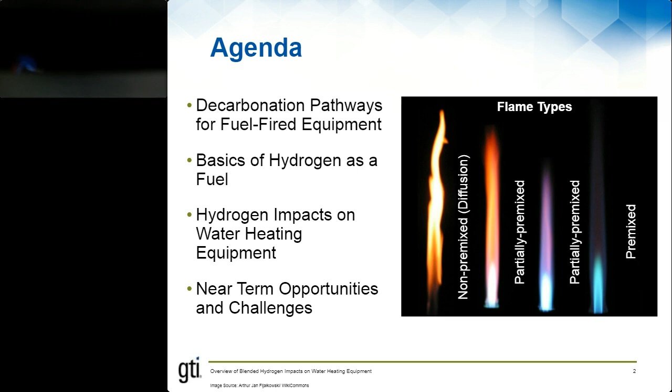And so what are we actually here to talk about? First, you should see a video of a water heater burner operating with a 30% hydrogen blend with methane. And this is really what we're talking about. This is the hot topic for this particular session here. We want to see what are the impacts when we change the fuel by adding this low or no carbon addition to natural gas. The first version you saw was a standard burner operating in most gas water heaters.

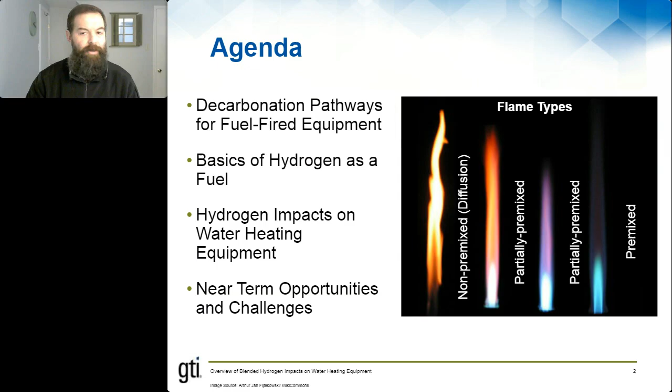This is an ultra low NOx version operating in water heaters in California and more recently in the Salt Lake City area of Utah, so an ultra low emissions version of the same thing. These are the workhorses of water heating, but let's first talk about decarbonization. So for the more than half of homes and businesses that use fuels for water heating today, we need to acknowledge that this is a large set of the building stock.

Over 80% of homes, for example, were built before the year 2000. The average lifespan of a home in the U.S. is estimated at about 130 years. So when we're looking out to 2030 and 2050, a lot of the buildings that we need to decarbonize exist today.

And for those that are served by fuel-fired technologies today, where they may be mostly existing buildings in cold climates, where they have thermally intensive loads, or increasingly where decarbonized fuels are available on a regional basis, the technology needs are sort of more of what we talk about through this forum and others: gas energy efficiency, thermally driven heat pumps, micro CHP, and fuel cells. We'll focus today on the fourth item here, hydrogen-fueled equipment.

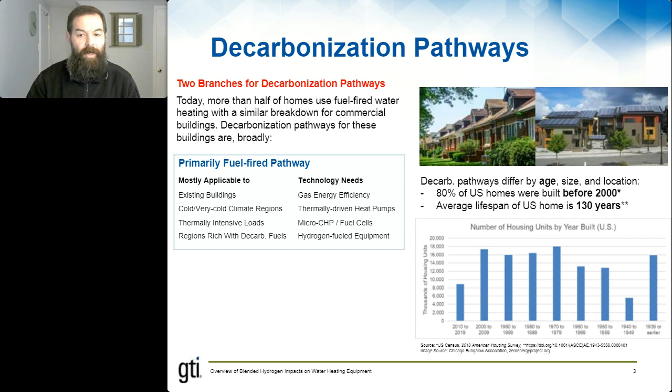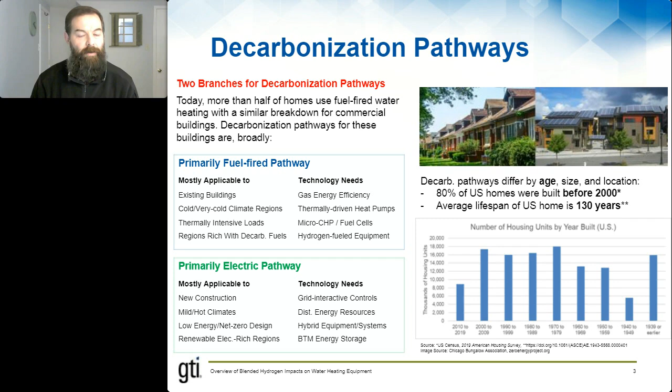Of course, there is a second and a different branch of where decarbonization will play out for these buildings, and this will be primarily served by electric technologies or electricity as a delivered energy source. This may apply mostly to new construction or mild and hot climates, low energy net zero designs, areas where renewable electricity is plentiful and cost effective. The technology needs will differ for these, where balancing services on the grid side will be more important. DERs and a lot of the other topics addressed throughout timely forums like this will apply there as well. So again, we're going to focus on the first pathway here and hydrogen as a fuel.

So let's talk about why. Decarbonized fuels can be coupled with energy efficiency to really drive greenhouse gas emissions reductions. I think most folks are aware that hydrogen as a fuel emits no CO2 directly, and it can be blended with natural gas or biomethane for standard products, and there can even be specially designed equipment to use 100% hydrogen for heating applications or other applications as well. Hydrogen doesn't really exist on its own, but it can be viewed as a way of storing a lot of energy for a long period of time, and that energy can be renewable. So that's really why it's having a bit of a moment right now.

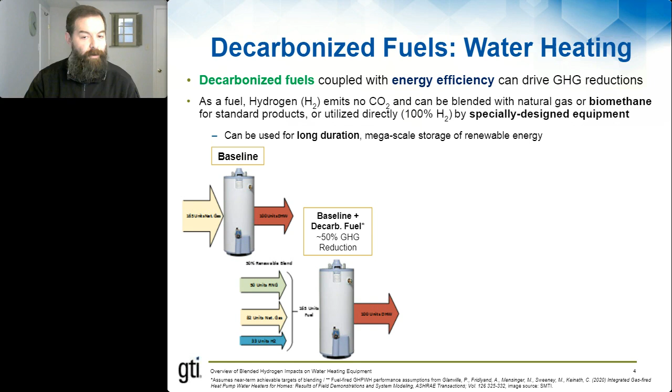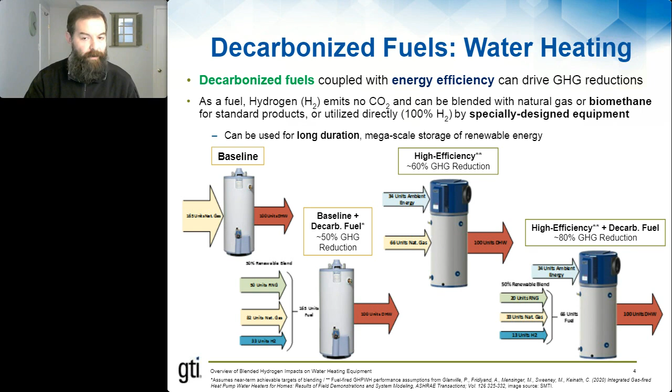Now let's just illustrate this in a simple way. Most of the water heaters out there using delivered fuels today tend to be low efficiency storage type. We can offer a blended decarbonized fuel to those products to drive a roughly proportional reduction in greenhouse gases. Of course, as we know through ACEEE and their leadership, energy efficiency is often the best place to start when you want to reduce greenhouse gases. And with heat pump technology for fuel-fired products, we've shown in previous studies that we can reduce a significant amount of greenhouse gases. Now, what we're talking about today is combining the two: going with high efficiency and decarbonizing the fuel, either partially for this talk today, or in the future with pure decarbonized fuels.

So where does this fit in context? GTI recently joined EPRI in an effort called the Low Carbon Resources Initiative. This is really looking at economy-wide decarbonization strategies through 2030 and 2050. While this is somewhat of a complicated diagram, it represents in a simple form, believe it or not, how decarbonized energy carriers, hydrogen, ammonia, carbon capture, these things that are scaling up right now, can play a role in how we decarbonize how we use energy in the future. For us, in water heating, we're looking at buildings in the upper right-hand corner, where in the future delivered pure or blended hydrogen may be a part of our energy mix, and this is what we're going to talk about today.

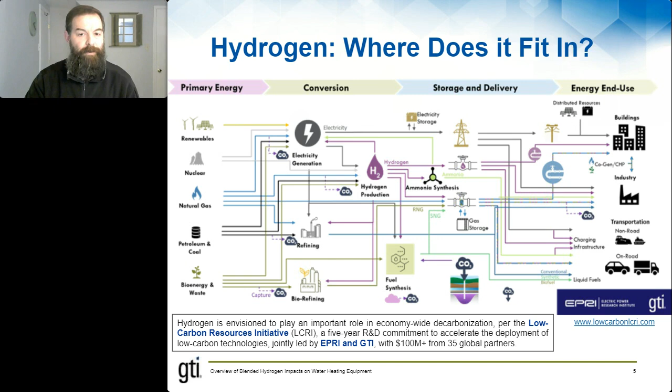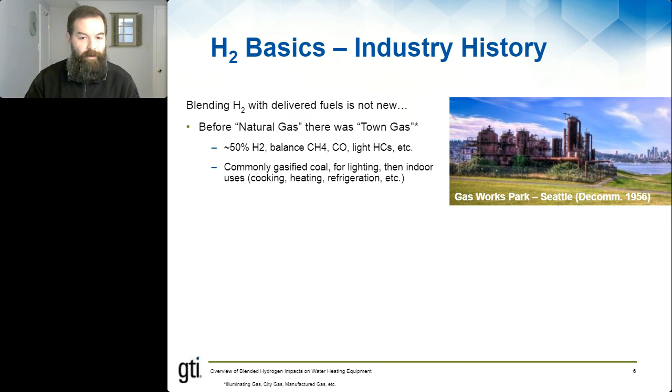So let's talk a little bit about history here. Blending hydrogen with delivered fuels is not new. In fact, before natural gas, there was town gas, and in a way, natural gas as a term is intended to distinguish from that. I used to live in Seattle, and there's a great park there called Gasworks Park, which is a former coal gasification facility that delivered town gas to Seattle in its earlier heydays. That gas is about 50% hydrogen in most cases, with the balance traditional hydrocarbons. Whether it's from gasified coal or others, it tended to be used for lighting and then later for indoor use. Of course, after World War II and the expansion of natural gas as a delivered fuel, a lot of this was phased out, and that particular facility was turned into a pretty cool park there off of Lake Union.

But there are places, such as on Hawaii, on their main island, where there are delivered fuels today that do contain some hydrogen. And it's a sizable amount of customers there. Of course, this legacy exists in terms of how we design and certify equipment, as these manufactured gases, as they're called, are part of current studies and standards, in addition to propane and natural gas, how products are certified today.

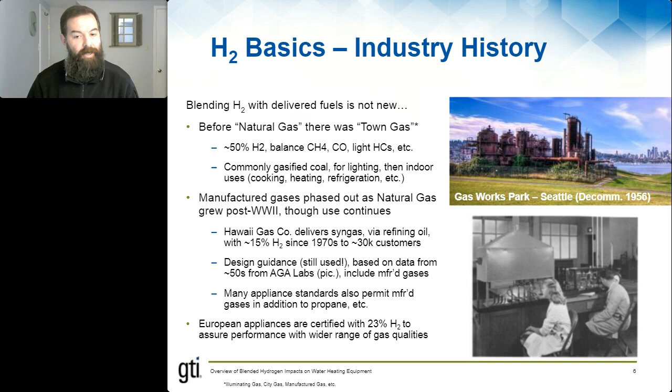Of course, in Europe, where hydrogen is looked at a little bit more seriously as a delivered fuel for decarbonization, appliances today are certified with a hydrogen blend of up to 23% to look at changes in gas quality, which tend to be a wider variation than we see in North America.

Now, there's a lot of activity in this space right now, where hydrogen is being looked at as demonstrations to generate, store, and use hydrogen at multiple scales. A lot of them are in Europe or Asia, as shown here, but increasingly they're in North America as well. And we'll hear about Kevin's work in Southern California, really interesting updates there in North America.

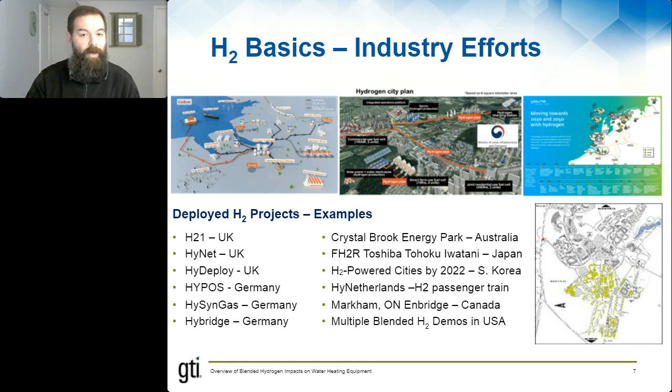Now let's talk about hydrogen too. It doesn't exist in the same way as electricity. It's generated from something. So in terms of carbon content, we have to be mindful of this. Brown hydrogen and gray hydrogen, these colors that are often used, represent fossil sources of hydrogen today. And for gray hydrogen, steam methane reforming of natural gas, this is the vast majority of hydrogen that's used today and generated.

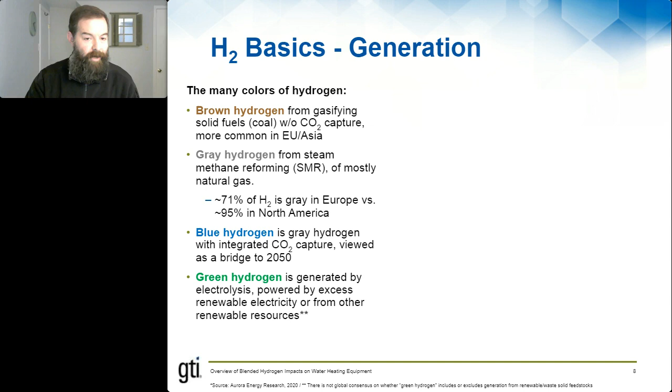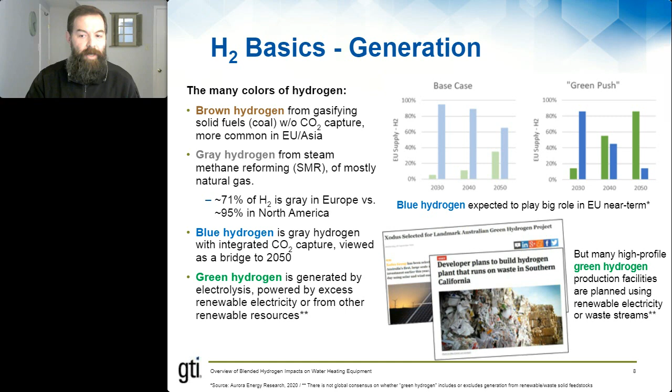However, in the future and the near term, we talk about blue hydrogen and green hydrogen, whether it's a gray hydrogen with carbon capture or if it's generated from renewable resources as a form of storing excess renewable electricity or utilizing a renewable stream. There are a lot of studies looking at how these colors of hydrogen will shift over time, but I think really the goal is to shift towards green hydrogen as far as the color spectrum is concerned.

Now, when we add hydrogen to natural gas, it really can be first viewed as a gas quality issue because natural gas does vary in gas quality, how appliances handle these shifts in the constituents of natural gas today. Building on a lot of efforts in Europe, where GTI and some of our colleagues are involved, there are 3 general tiers of blending when it comes to how it impacts equipment, and they're shown here by volume. So, for instance, 10% by volume in most cases, no or minor adjustments are necessary to existing equipment.

Medium blending, 10 to 30%. Again, these are very broad numbers. Maybe some small adjustments are possible with combustion hardware or controls. And then high blending, roughly speaking, 30% or above. At this point, you might as well be designing a specially designed piece of equipment to handle pure hydrogen. And these are sort of general rules of thumb.

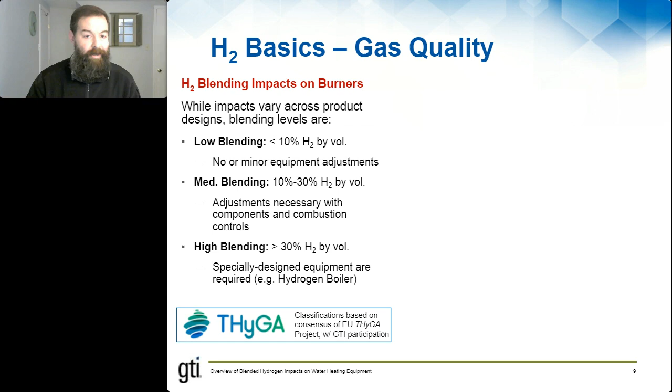And why is this? Hydrogen is a very different fuel. This chart shows some of the properties that we'll explore throughout the session here, where while it does have no carbon dioxide emissions as it's used, that response is nonlinear due to the fact that it is a much lower density as compared to methane, and also has a reduced heating value as well. It has a hotter and faster flame, it's more readily lit, and it can also impact NOx emissions and flame stability as a result of those 2 properties.

And finally, as sometimes discussed, hydrogen has long-term impacts on equipment as well due to the fact that it's very small, it can leak, and it also can impact materials as it does that. It also has a reduced requirement of combustion air as you blend it with methane, and we'll see how that offers some benefits in some testing.

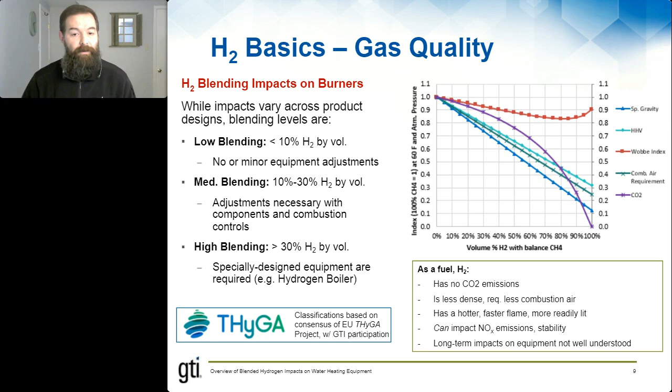Now, for the vast majority of burners that are out there today, we can put them into 3 broad groups. And this really has to do with how air is mixed with fuel prior to ignition. If there's no air mixed, if fuel and air meet at the point of combustion at the flame, we call it a diffusion flame. These are not as common in a lot of the applications we're talking about here. Pilot light is one example, but in some cases, some fireplaces are operated in this way as well.

Partially premixed, where some air but not sufficient. Lambda as a marker, in that case, is between 0 and 1. This is the vast majority of burners that are out there today that are operating in our homes and businesses. And premix, which is often used for higher efficiency equipment, compact equipment like tankless water heaters and ultra-low NOx versions, as it is a good way of reducing NOx emissions.

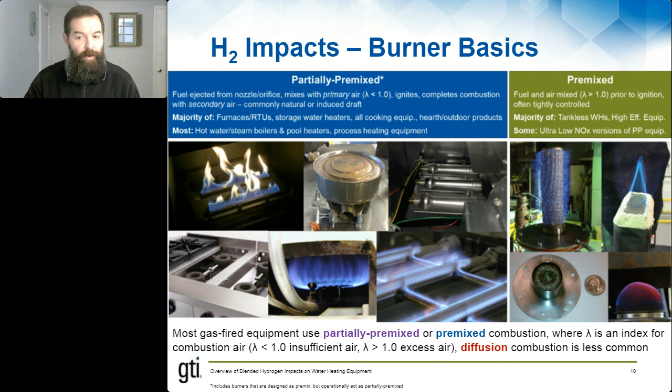This is where fuel and air are carefully combined prior to ignition and often can be controlled independently of one another, which is not the case for partially premixed. So these distinctions we will refer to throughout this session.

Now, for water heaters, one of the first things that we notice is that because of its reduced volumetric density, adding hydrogen will derate or reduce the heating rate of the water heater, meaning that less BTUs will be delivered from the flame to the water heater itself. And that's a universal property.

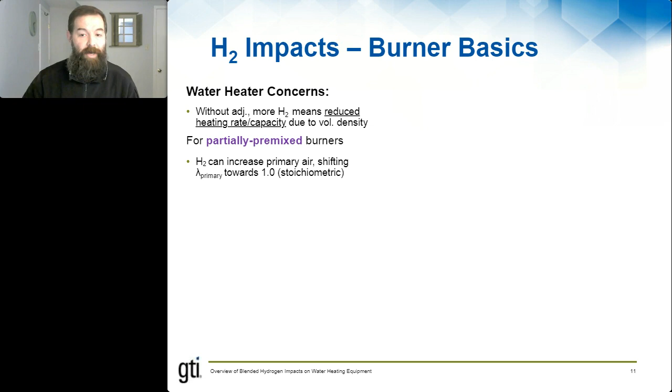For partially premixed burners, which represent the vast majority of those applied in water heating, both commercial and residential type, other things that we'll notice is that the primary aeration, the amount of air that's mixed with fuel prior to ignition, will shift towards stoichiometric, meaning it will increase. It will go towards 1 in most cases. And this is important because we're talking about a change in flame speed.

A lot of concern with adding hydrogen means that we may have flashback, which is where the flame actually kind of sucks back towards where the fuel and air are coming from, and the flame will often go out. The system will need to be addressed as a result. The opposite impact, where the fuel and air flow rate is faster than the flame speed to the point that the flame blows off, is not as much of a concern in this case here. Now, also the flame may be hotter, and it also may have stability issues as well as noted.

Where things get complicated is that the burner design, the combustion chamber design, how the flue or the venting is deployed, the back pressure, all of these things will have impact. So these are not necessarily predictive traits. We'll see that with some results in just a second. However, there are two indices that are important when just talking about the amount of hydrogen we're adding.

It does impact the Wobbe index, which is a frequent term used in gas interchangeability. This represents that for processes that have the same Wobbe index, the heating rate delivered to the appliance will be the same for an orifice where the fuel is coming out with a fixed pressure. So this is really a way of asking, will it have the same heating rate, roughly speaking. And for hydrogen, the Wobbe index is much more stable than some of the other properties we're talking about.

Another property which is also applicable to partially premixed flames is the combustion air requirement index. And you can see it's defined by the air-to-fuel ratio based on the fuel properties. This gives us a sense of how the primary aeration, or lambda, will be impacted for partially premixed equipment.

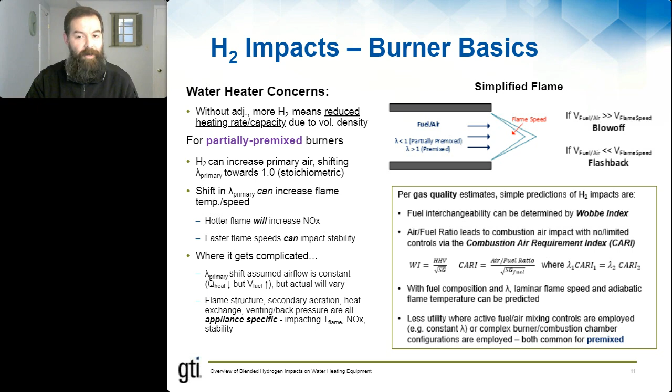If we take a pancake burner, a very standard burner in water heating, and we have a standard representation of natural gas here, a Wobbe index of 1373, a specific gravity, a way of showing the volumetric density as shown. The firing rate is shown. The primary aeration is shown as 60%. That means 60% of the air for full combustion is mixed with fuel prior to the point of ignition. The air-to-fuel ratio and the combustion air requirement index are also defined.

If we take that same burner and we add 30% hydrogen by volume, you can see how things are impacted. The Wobbe index reduces by a slight amount, meaning that our heating rate will reduce slightly as well, but a much larger reduction in the volumetric specific gravity of this particular fuel. Firing rate will decline as a result, meaning the heating rate to the appliance will also decline.

We'll show later on the test results suggest that the efficiency really doesn't change as much, but the capacity will, so the unit will run longer, but not necessarily less efficiently. Primary aeration goes up, and air-to-fuel ratio and combustion air requirement index are also impacted.

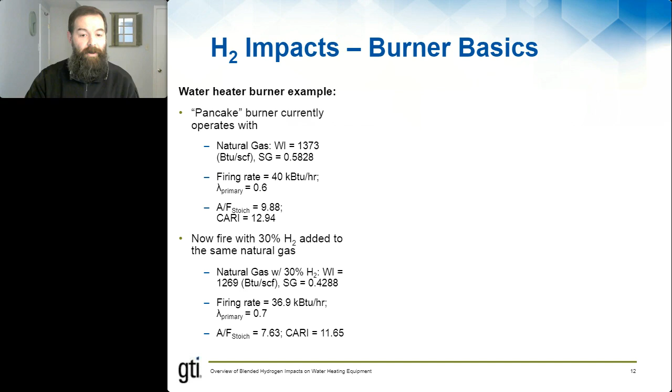Now we can chart some of these properties here. This shows the laminar flame speed for different blends of hydrogen based on a GTI model. We start at the blue point here and move to the green point here. And why is this important? You can see our flame speed is increasing.

We're also going towards lambda is equal to 1, or the equivalence ratio, the inverse, is equal to 1 as well. This can mean that we may look for stability issues with this particular case here. On the premix side, where we're on the other side of the dome, depending on how air is controlled, we can either shift left or go straight up if we have a constant lambda or a device that tries to maintain a fuel-air ratio through advanced controls.

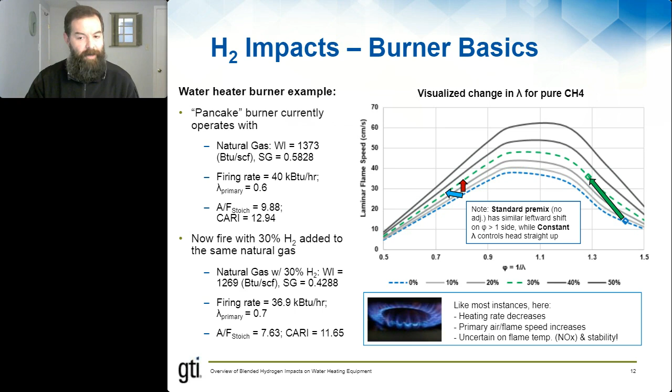So I think the overall point is that it's complicated. We can learn some things about what happens when we add hydrogen, but we don't know everything. But like most instances, the heating rate decreases, air-to-fuel ratio, air and flame speed will increase, but we can't say much about flame temperature or NOx or stability. So these show you some photos of most of the appliances out there.

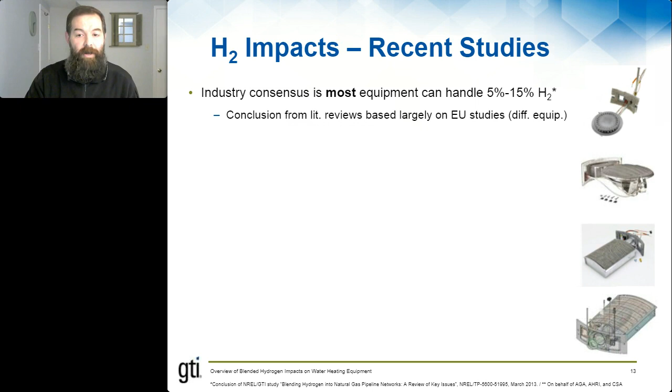Let's talk very briefly about some of the studies out there today. The industry consensus is that most appliances can handle 5 to 15% hydrogen. This is largely based on studies looking at what's been happening with Europe. There's been a lot of activity in this space. You'll hear about some of them today. The level of hydrogen blending varies in these studies. What the balance fuel is: in the GTI study and others it's balance methane, and in others it's balance natural gas. And then what equipment are selected and what burners are operated also vary, and of course how they are operated.

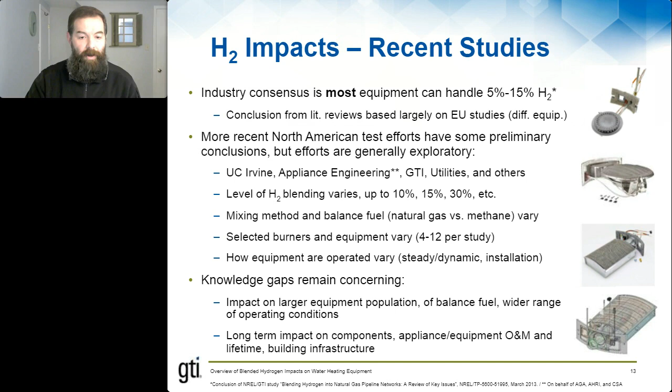So there are some knowledge gaps that remain. What is the impact on larger populations of equipment? What happens when we have a different balance fuel, a wider range of operating conditions? Or of course, what are the long-term impacts on the equipment life as well? These are all open questions at this point.

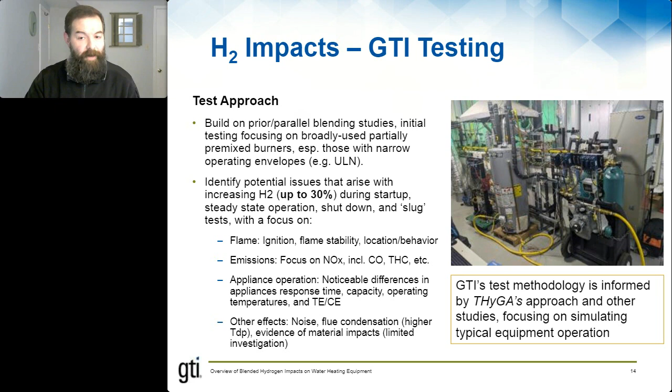So let's get quickly into some results before I wrap up here. GTI is engaged in some testing of water heaters and other appliances with up to 30% hydrogen blends. You saw a video up front on some early results here. We're looking not only at the ignition and flame stability and location and behavior of the flame, but also emissions results. We're looking at the appliance operation, the impact on efficiency, and other more customer-facing impacts like noise, excess condensation. And this is an effort to align with some of the other studies that are underway in Europe.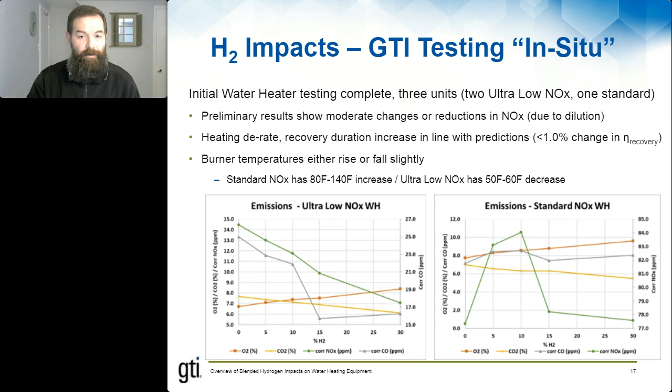So let's just cover what's next here. GTI will be continuing to perform short and long-term tests on these kinds of equipment and other appliances as well, moving from furnaces to fireplaces, cooking products and boilers. We'll be sharing these results more widely outside of presentations like this. We're also looking at parallel efforts to introduce small-scale hydrogen sensors into equipment and small-scale distribution, and also importing and tech transfer with 100% hydrogen-tolerant products under development abroad.

And there are a number of blending efforts underway, studies underway, where in the field we can also apply some of these techniques. And then finally, we talk about hydrogen, but there's also renewable natural gas or biomethane. We do have some studies underway looking at the impact on trace contaminants in that kind of replacement natural gas, and also on the back end, looking at what we can do in larger buildings in directly capturing the carbon

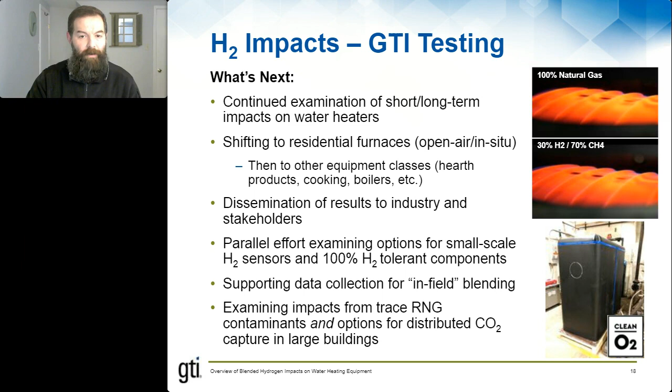dioxide. So looks like I went over a little bit here, but thank you for your interest. No worries, Paul, and thank you. Way to end up with that teaser of showing off that big black box.

So thanks again, Paul. Our next speaker is Yan Zhao, and Yan is a research scientist at the UC Irvine Combustion Laboratory. You'll see in just a minute, he is literally there. Yan has experience working on both domestic combustion systems as well as gas turbine combustion for power generation. And right now, he's working on renewable hydrogen adoption in residential appliances. So Yan's going to build on, or maybe zoom in on some of what Paul was talking about and talk very specifically about hydrogen-fueled impacts on residential equipment, some of the simulation and testing results that they have seen there. So with that, Yan, I will turn it over to you.

Yep. So thank you, Aaron, for the very nice introduction. So hello, everyone. My name is Yan Zhao. I'm from UC Irvine Combustion Lab. So I'm going to share some of our experimental results today on hydrogen-fueled impacts on residential equipment.

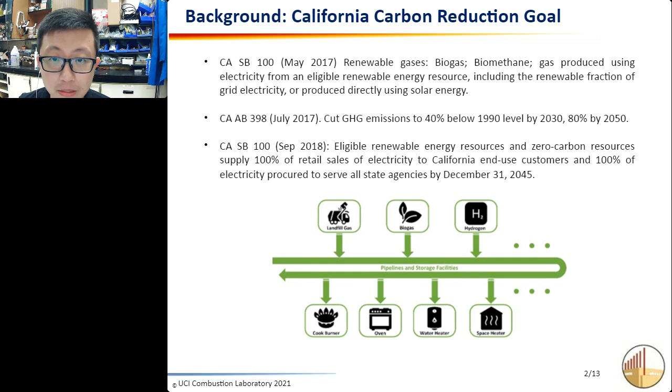So we are located in California. California has a very ambitious carbon reduction goal. By 2030, it's trying to reduce the carbon emissions 40% below 1990 level, and 2050 is going to be 80%. And by the year of 2045, California is trying to achieve 100% renewable electricity. So one way to help achieve these goals is to blend some renewable gases into the pipeline natural gas. And the challenge is what would be the influence of the renewable gas on these appliances we already have.

And here shows the California residential appliances status. So on the left side, you can see around 49, like 50% of the residential natural gas is consumed by water heating, and 37% by space heating, and the rest would be cooking and dryers and other applications. For electricity use, it's kind of different. The water heating and space heating only takes around 5% of the electricity use, and most of the electricity is used in lighting, fridges, and TV or computers.

So down there on this plot, you can see the different appliance types. The dark bars stand for the gas appliances, and the light color bars stand for electric appliances. So you can see for water heating appliances, more than 90% of the appliances in California are still gas appliances. So it's very promising if we want to replace the natural gas with some renewable gases, especially hydrogen, because hydrogen is carbon-free.

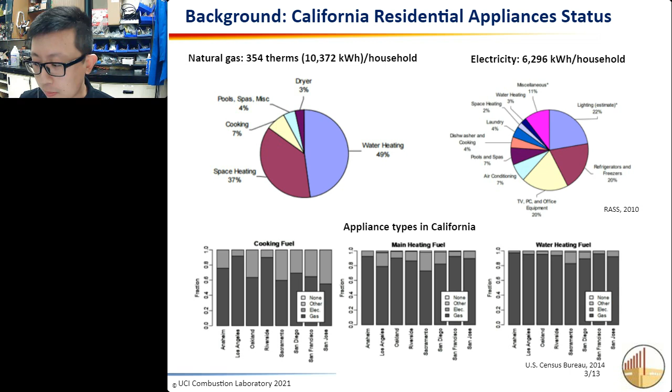And so when we want to replace pipeline natural gas with renewable hydrogen, we want to understand what's the difference between these two fuel classes. So you can see the comparison chart here. Methane is one of the major contents in natural gas. So you can see hydrogen has a much lower density compared to methane. And also the flame speed of hydrogen is 5 times that of methane. And also the flammability range of hydrogen is much wider than methane.

So one of the main properties we care about in combustion devices is the heating load. So you can see the equations here. The heating load is proportional to the Wobbe index. So that means when we don't change the pressure drop from the pipeline to the combustion device or the combustion device parameters, the heating load of the combustion device is going to be proportional to this Wobbe index.

And so even if hydrogen has a much lower heating value on a volume basis compared to methane, the Wobbe index of these two fuel classes are quite similar. You can see here methane is 52 megajoule per cubic meter, and hydrogen is around 48.5. So that means when we try to replace natural gas with hydrogen, the heating load will not change too much.

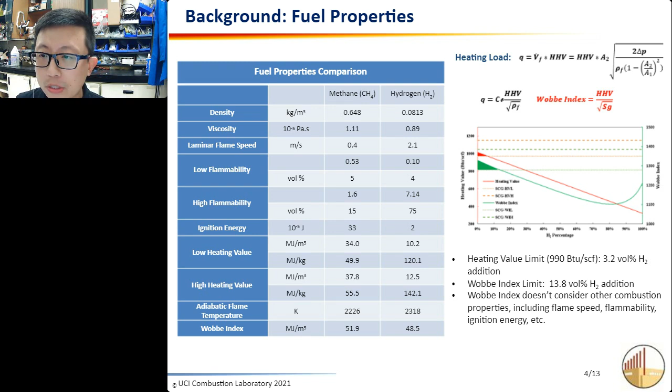And due to the similarity of the Wobbe index of these two fuel classes, we can inject around 14% hydrogen. But in our study, we're not limiting ourselves based on these regulations. We just want to see how much hydrogen we can inject into different appliances. And also the Wobbe index doesn't consider other combustion properties, including flame speed, flammability, or ignition performances. So we want to see what's the influence of hydrogen on all these kind of combustion performances.

And the emissions would be one of the major concerns for current water heating applications. You can see here are some selected NOx emission regulations and CO emission regulations in America now, because we are located in Southern California, and we have the South Coast Air Quality Management District here, which has almost the most strict regulation in North America. So currently, the most strict regulation on NOx emission is 10 nanograms per joule, or 15 ppm, based on 3% oxygen correction. And in the year of 2015, the state of Utah also adopted this regulation. So more and more states are trying to adopt this low NOx water heater regulation.

So if you want to buy a water heater online, for example, from the Home Depot, you can check. There are notes here saying that California or Utah residents need to check the labels. And there are usually two types of labels. One is saying that maybe this water heater doesn't meet the ultra low NOx regulation. Some water heaters say that they meet the low NOx standard of California. So AQMD is certifying low NOx water heaters. If you go to their website, you can check what water heaters are considered as low NOx or ultra low NOx water heaters.

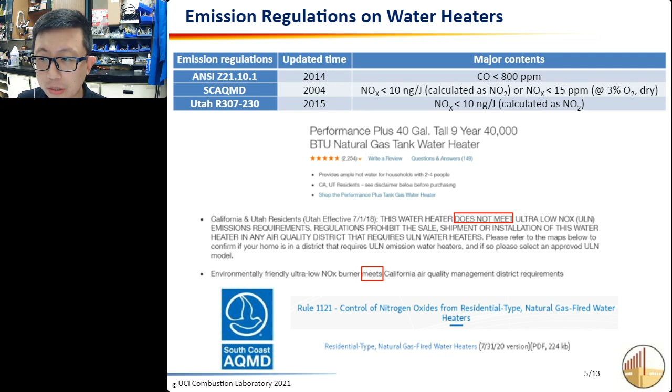So usually there are two types of residential water heaters. One is the storage water heater, one is the tankless water heater. So we tested both types. Today I'm mainly going to talk about the tankless water heater here. You can see here we have the fuel mixing panel. We try to mix different fuels together and then supply the fuel mixtures into the water heater. You can see there are two stages of heat exchangers, the primary heat exchanger in the tankless water heater and the secondary heat exchanger, which is trying to condense the water from the exhaust, so trying to take more heat from the combustion. And we have different HORIBA emission analyzers trying to measure different emission species, including NO, NO2, N2O, ammonia, CO, unburned hydrocarbons, etc.

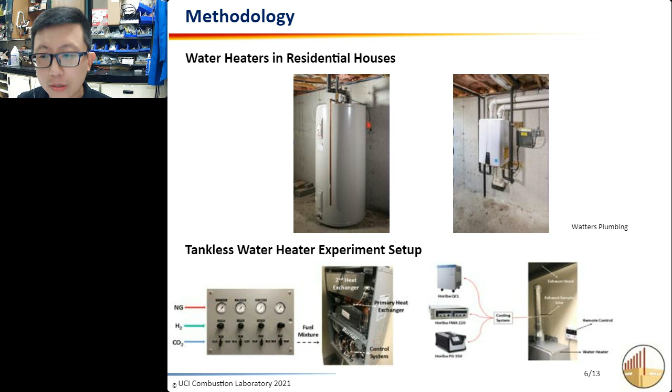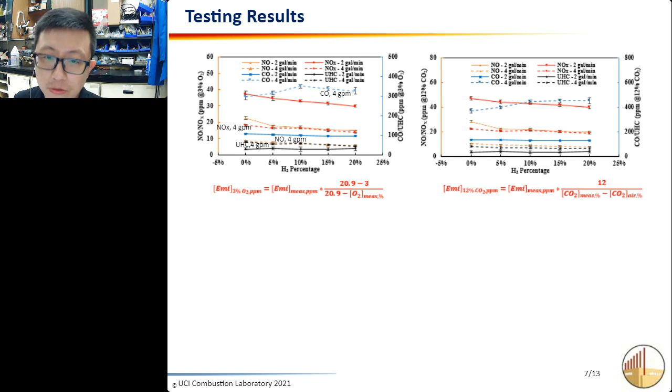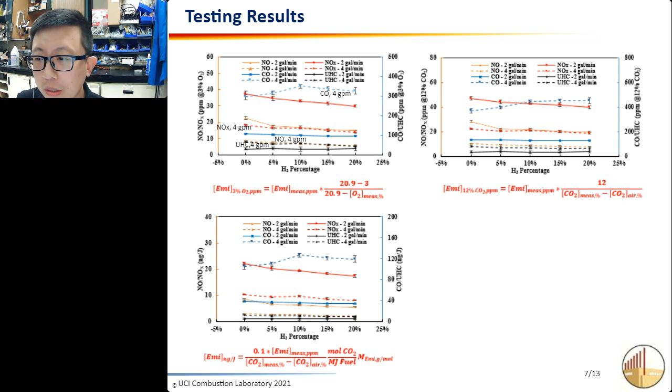And there are different types of correction methods. So the first plot is the ppm level based on 3% oxygen correction. And we also have the CO2 correction. And here we have calorific correction, how many nanograms per joule emissions. So generally speaking, hydrogen addition into this tankless water heater will decrease the NOx slightly, but doesn't change the CO or unburned hydrocarbon emissions.

And the second plot shows the air-free correction, which shows a relatively flat curve. You can see the decreasing trend of the NOx is not too obvious. This is due to the property of this equation. You can see the CO2 is in the denominator. So when we try to replace the pipeline natural gas with renewable hydrogen, the CO2 in the denominator will decrease, so the total value of the emissions will increase. That's why we see a relatively flat curve here. And also the water flow rate influences the emissions of this water heater.

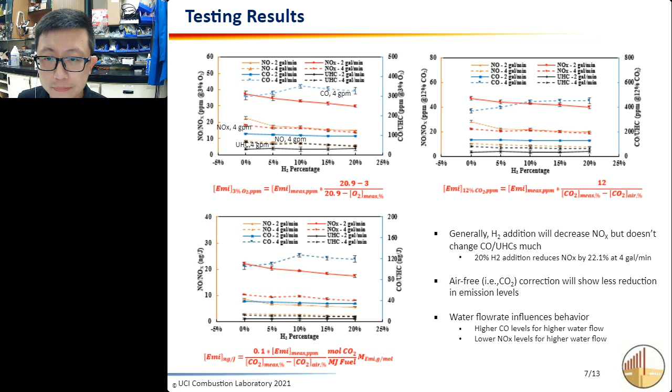So some other observations. For this tankless water heater, we did see a higher water condensing rate from the secondary heat exchanger as we add more hydrogen, because the only product of hydrogen combustion is water. So we did see some more water coming out of the water heater from the condensing heat exchanger. And also we did see a slight efficiency increase when we try to replace pipeline natural gas with hydrogen, but the increase is not very obvious.

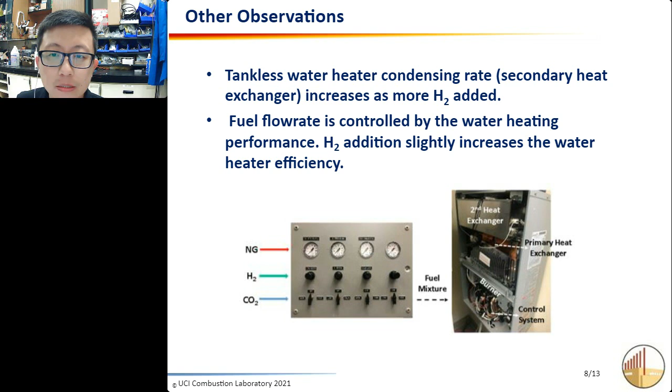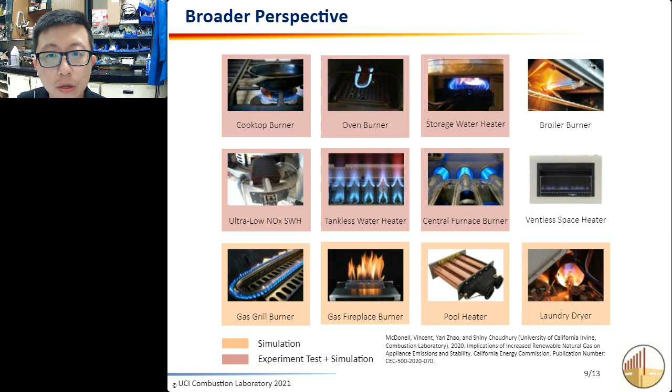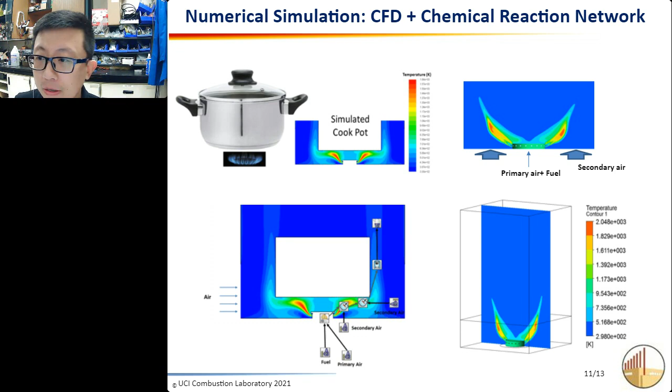So conservatively speaking, if we want to replace around 10% of the pipeline natural gas with hydrogen, we can reduce 1.63 million tons of CO2 every year in California. And this is equivalent to around 354,000 gasoline vehicles being removed from the road.

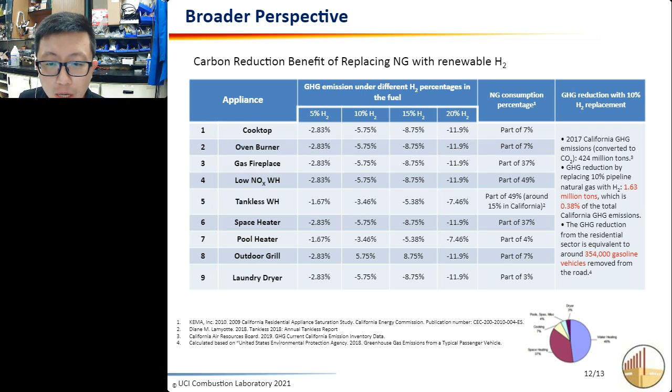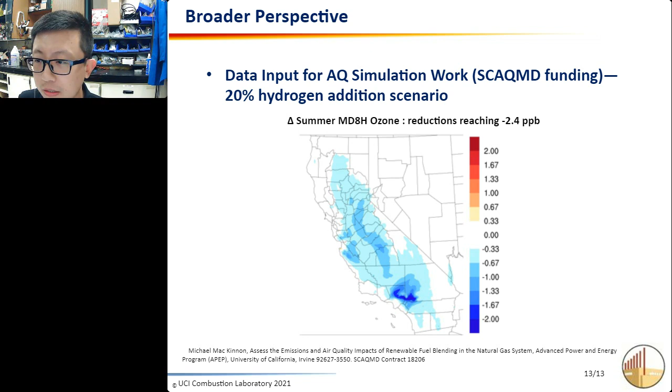And in our lab, we're also doing a big picture analysis on how the hydrogen addition to the pipeline natural gas will influence the air quality in California. So this is the project we are cooperating on with South Coast Air Quality Management District. So here is the primary result. When we try to replace the pipeline natural gas, we can reduce some NOx emissions from the combustion devices, which influences the ground ozone level. Again, if you are interested, please contact us so we can share the results with you.

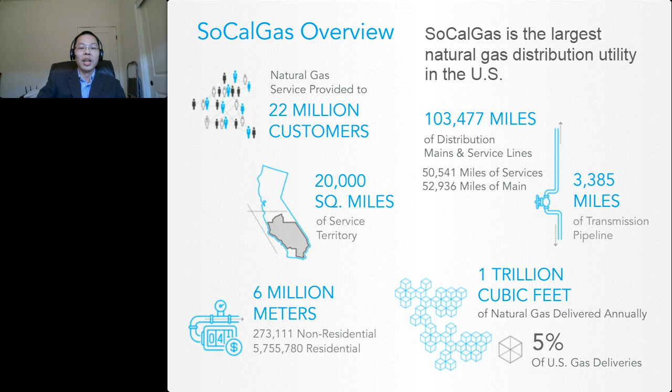So just a little bit of info about SoCalGas. We are the largest natural gas distribution utility in the United States, serving approximately 22 million customers through about 6 million meters. Our service territory covers over 20,000 square miles through over 3,000 miles of transmission pipeline and over 100,000 miles of distribution pipeline.

So very recently, SoCalGas announced our goal to become the cleanest, safest, and most innovative energy company in America. We believe that every Californian deserves a clean, affordable, and resilient energy future. And hydrogen is one of the key opportunities before us to make these goals a reality.

So in the state of California, our Public Utilities Commission has already opened that window of opportunity for the state's natural gas utilities to help create a hydrogen blending and injection policy that will really ground the hydrogen as a clean energy fuel for California's future.

Of course, when we talk about blending hydrogen into our pipeline system, it all starts with safety. Our blending policies in development revolve around the safety of the public, our employees, and the pipeline system. In order to develop and inform our policies, we have been embarking on intense research, collaboration, demonstration projects that will ultimately lead to a blending and injection standard on our system.

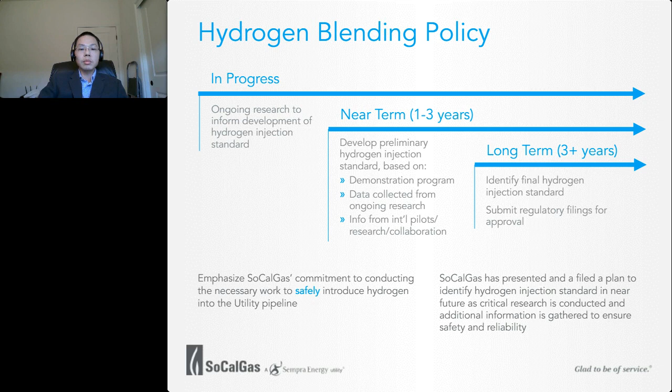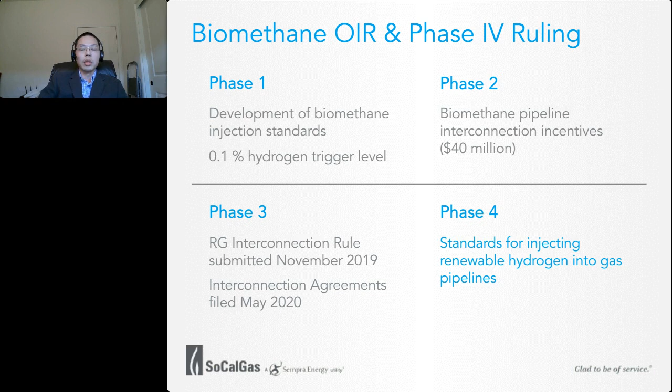So certainly the opportunity of hydrogen in the natural gas infrastructure is not without its challenges. Paul and Jan have spent some time discussing the unique properties of hydrogen and how they impact our appliances. At SoCalGas, we're looking at hydrogen blending through 3 primary focus areas. So that's safety, reliability, and integrity.

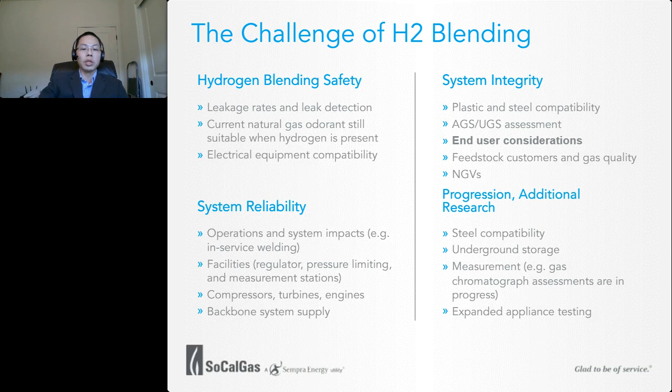Okay, so what have we done, or what are we doing at SoCalGas to investigate end-user impacts from hydrogen blending? Well, we do have multiple research efforts ongoing now and have already been completed. What's relevant to today's discussion is the residential and commercial appliance testing we conducted between 2014 and 2015. For this test, we investigated several different types of appliances that did include a traditional tank-type water heater with an ultra-low NOx burner and a condensing tankless water heater, which I'll be sharing some info on today.

To help us better understand the impacts of blending, we tested at 5% hydrogen by volume, 10% and 20%, and compared those results to our typical pipeline gas. These results included performance measurements such as the energy consumption, flame characteristic observations, such as noting any flame lifting, yellow tipping, or flashback, and measurement of the gas constituents to calculate the heating value data for interchangeability impacts. So very similar to the testing that Paul and Jan have been doing in their respective laboratories.

So a couple qualifications that I'd like to point out before we move into the information. First, our lab is an experimental test lab, so we're not a certified lab. So the results that we collect are primarily for learning purposes. The second thing is the key folks who worked on this project back in 2014, 2015, they're actually no longer with the company. So I'm more than happy to answer your questions to the best of my ability, but I may not have the answers to specific experiences related to the actual testing.

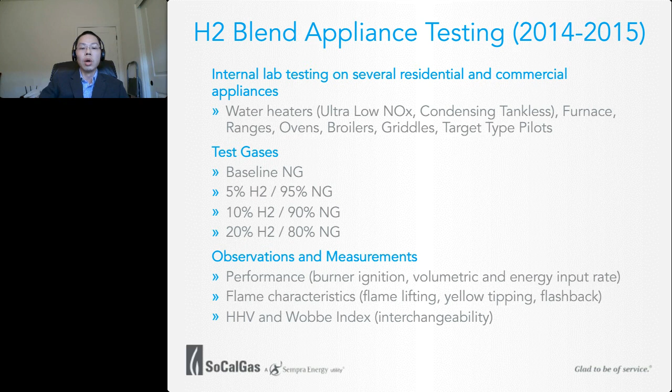And the third thing I want to point out was, although the team did collect emissions data during the testing, the methodology they used was not verified, so I won't be sharing those specific results today.

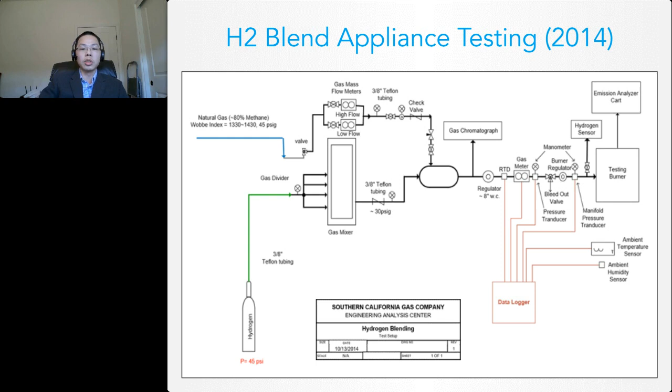Okay, so starting off with some performance results on the ultra-low NOx water heater. So as expected, the fuel volumetric input rate in the orange line, it might be difficult to see these colors, and I apologize. The volumetric input rate went up with increased hydrogen concentration, while the energy input rate measured in BTUs went down, and you can see that with the blue line.

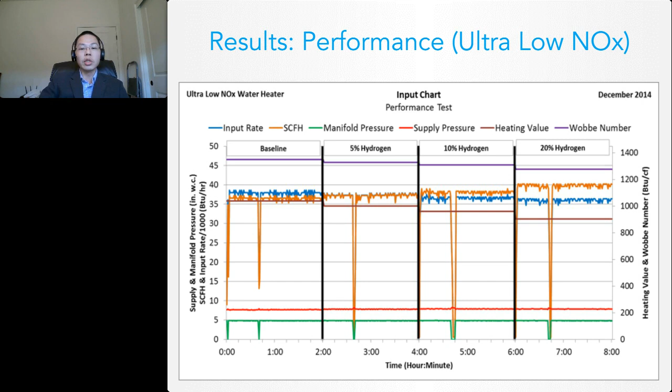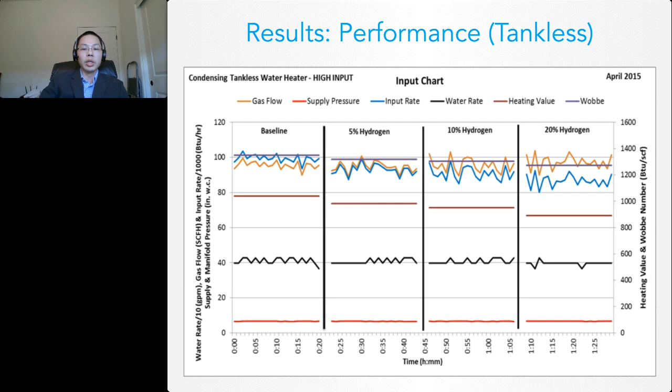Here's that same data set for the tankless water heater. So there's some more dramatic bumps in the data due to the modulating operation of the tankless water heater, but overall we see the same patterns of the increasing volumetric flow and the decreasing energy input, heating value, and Wobbe index with increasing hydrogen concentration.

So as mentioned earlier, the team did make some observations on flame characteristics during all of the appliances tested. Here's an example of the tankless water heater at baseline natural gas versus the different blends of hydrogen. What's key here are the observation notes in the right column, which essentially note that at no point during the testing did the team observe any issues with flame stability, yellow tipping, or flashback. And that same observation was made for all 3 modes of testing on the tankless water heater, so that'd be max, mid, and low firing rates, as well as the ultra-low NOx burner testing.

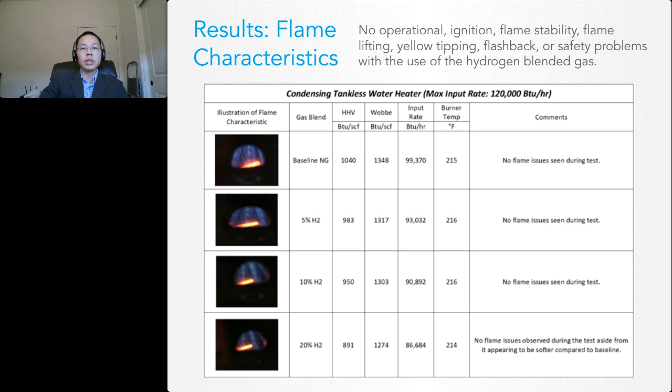So this is something that both Paul and Jan alluded to. A key challenge that we also kind of mentioned in the previous slides is the heating value and the Wobbe number of the gas, specifically the limits that we have in place in California. So for the SoCalGas service territory, we have our Gas Rule Number 30, which requires the heating value of the pipeline gas to be between 970 and 1150 BTU per cubic foot, which Jan did mention previously was at 990, but we just very recently updated that value on the minimum heating value. While the Wobbe number must be between 1279 and 1385.

So heating value and Wobbe, these are critical parts of our ongoing proceeding with the CPUC to determine how our Rule 30 and now our updated Rule 45 will be impacted and need a change to safely accommodate higher concentrations of hydrogen.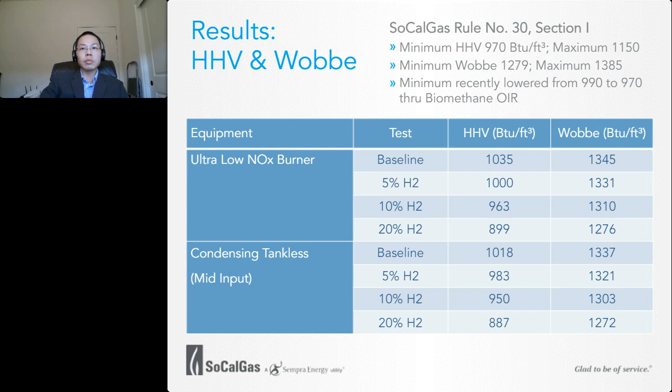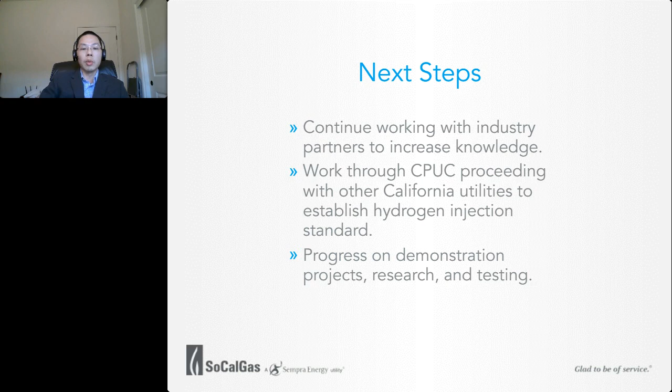So the appliance testing we previously went through, though very valuable in our understanding of the impacts of hydrogen, is only one challenge of hydrogen blending that we have been and are actively working on to gain a better understanding and level of confidence to ensure the safety, integrity, and reliability of our customers and gas system. To seize this great opportunity that hydrogen presents, SoCalGas will continue aggressively pursuing testing, research, demonstration and pilot projects, and forming and developing key partnerships such as GTI and UCI, all while remaining laser focused on our ongoing application with the CPUC.